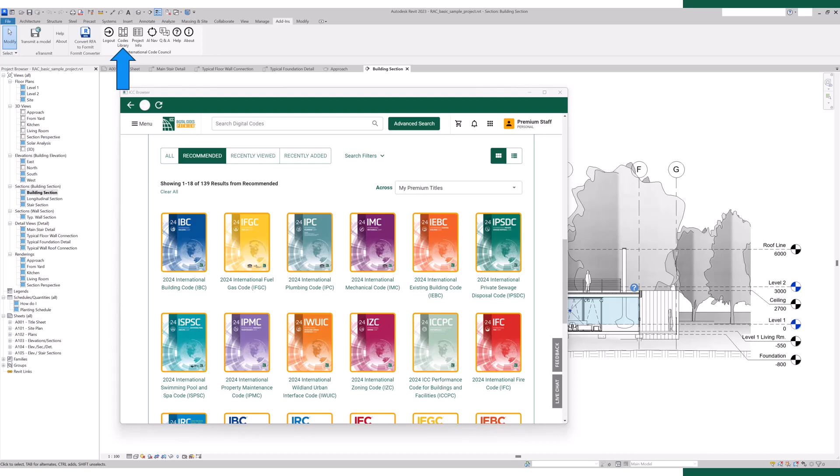In our previous release, we introduced the project information feature where you can document your project information with applicable building codes and save it with your Revit project file, enabling project knowledge sharing and workflows between designers on your team.

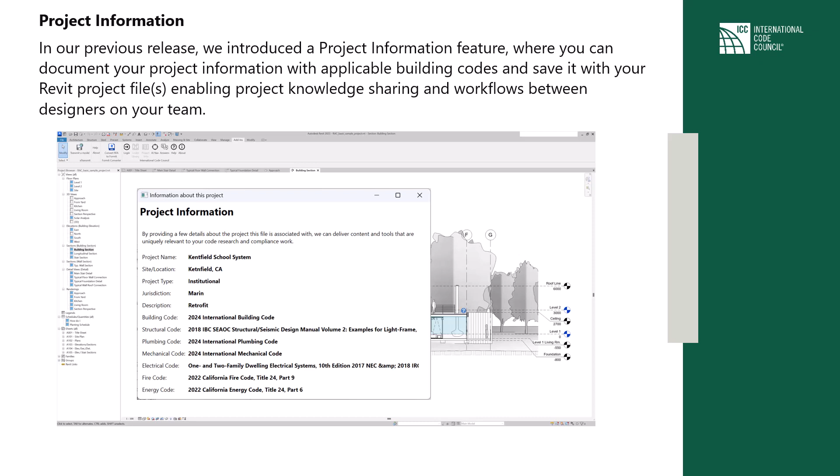What's new is that once you fill out your project information, we'll automatically bookmark those codes in the library and link them to this particular Revit file, making it easier to get to the right code information while you're working inside of Revit.

Also, once you fill out your project information, we will automatically create a project tag on our site. Project tags are immensely valuable when working with a library of information, as they offer a systematic way to categorize and organize data for each project, enhancing your overall efficiency and productivity.

You can use these project tags when you are documenting code information about this project as you're writing notes and attaching bookmarks in each digital code manual.

In terms of leveling up your expertise with the building code, our all-new AI Navigator offers quick, helpful replies to basic code questions and is programmed to help you navigate our iCodes like an expert. AI Navigator uses large language models, artificial intelligence, to provide answers and guidance to the relevant code content for users of our digital codes platform, and it's trained specifically on the ICC iCodes and certain state amended codes.

Also, we've now included access to our new Premium Answers site, which delivers a constantly expanding searchable database of questions and their carefully crafted interpretations from our ICC team of technical experts. Think of it as an ever-growing reference of code interpretations by those experts closest to the code.

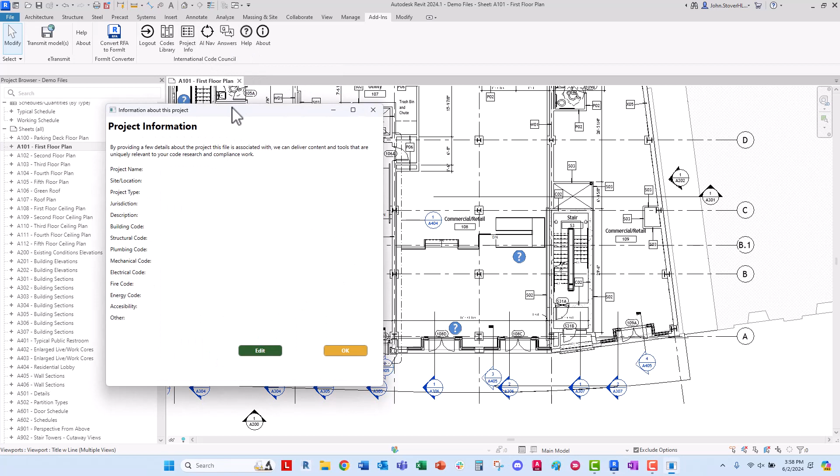In our last release, we implemented a new project information feature to capture key basic elements of the project each particular Revit file is associated with, including all relevant building codes, as you can see here as I fill this out. This information is saved within each Revit file, and anyone with access to the model will be able to see what codes are applicable.

Let's continue to document this project, a mixed-use property in Tempe, Arizona, jurisdiction Maricopa, and fill out a few of the building codes. The 2021 International Building Code. Let's put in a plumbing code specific to the Tempe jurisdiction, click on that, and let's go ahead and save it.

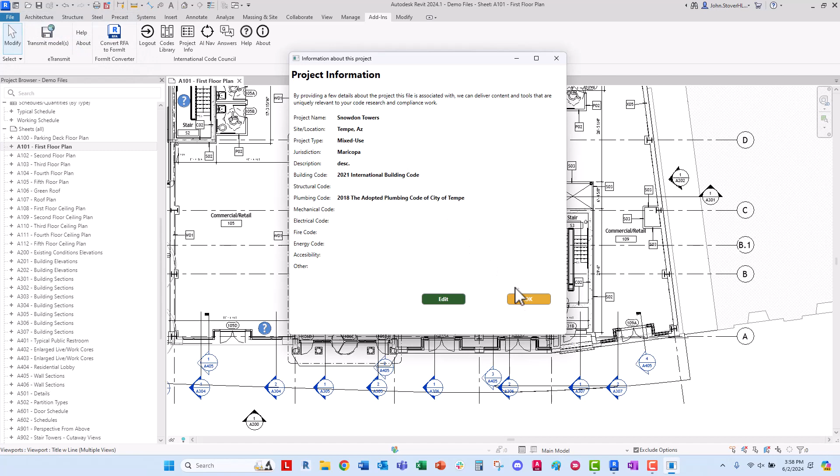Now what's happening is that we are writing this to the cloud service. We'll say OK. We also created a building code summary table or schedule that you can use on your cover sheet when it's all said and done.

So let's go over to the codes library and take a look. Under the menu, click on that. You can open up favorites, and you can see there that we've written each of these titles to your favorites page, so it's quick and easy to get access to them.

And as you can see here, we even have a feature that lets you know where you last left off in the book, in terms of jumping to a section, as well as letting you know which version of the title you're actually reading. So we can click on this and note that there's actually a new version in September 2021.

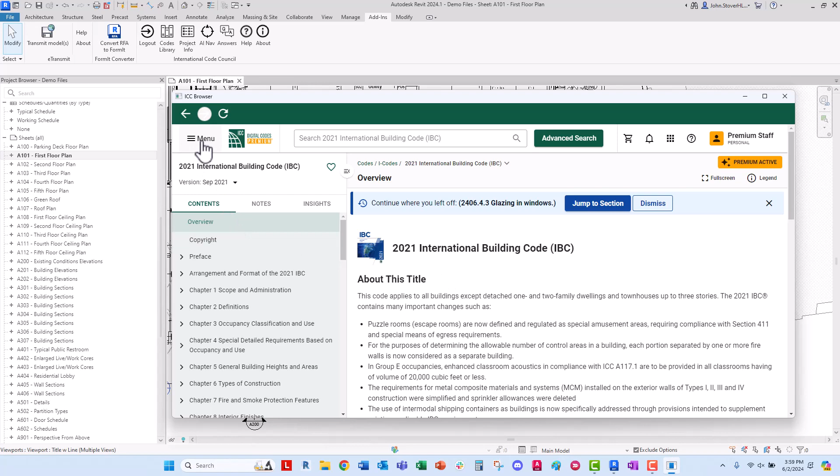And there we go, we know we're on the latest and greatest version of the 2021 IBC. So let's talk about project tags. Let's go back to the menu. Under Premium Tools, My Project Tags. Let's click on that. You can see we automatically created a project tag based upon the name of the project this Revit file is associated with, Snowden Towers in this case.

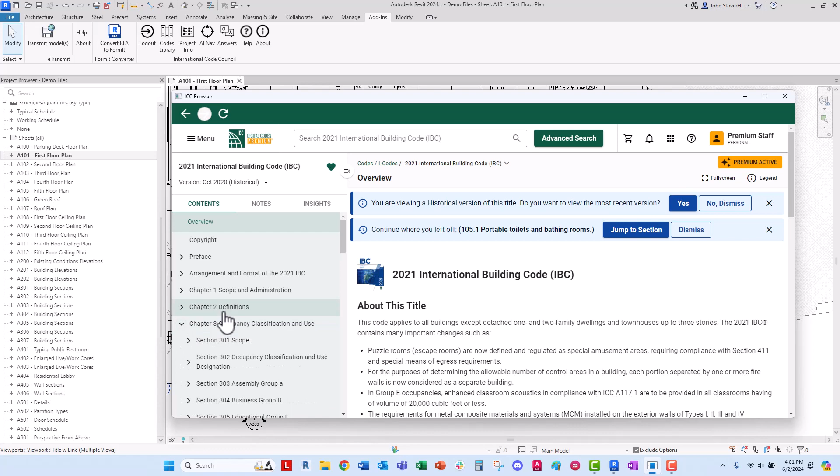So let's see how it's utilized. Let's go back to Favorites and click on the 2021 IBC, and let's go ahead and create a note. I'm going to scroll down here to Business Group B. Here we are, so you can see I can go ahead and click on this information and highlight it, and click on the Notes button, and let's go ahead and create a note that this is important to our project. So write some text there, and then click on the right project, Snowden Towers, say OK. Now this note is associated with the project tag, which is associated with my Revit file.

So let's go see what that looks like. If we scroll down to Premium Tools, click on that and go to My Notes and Bookmarks, you can see that I can now sort by all my projects. Click on Snowden Towers, and you can see this note I just created that's associated with it. So as you can see, project tags are immensely valuable when working with a library of information, as they offer a systematic way to categorize and organize your data for each project, enhancing your overall efficiency and productivity.

So up next is our new AI Navigator. Here's where you can get answers to your code compliance questions anytime. Currently, AI Navigator is trained on ICC's iCodes library, as well as state codes. It searches the 2021 editions of the iCodes, but you can also select from the 2018 or 2015 editions by selecting the Change Code Cycle option you see on screen. We will continually be expanding the scope of content across which AI Navigator is able to answer questions, including the 2024 editions coming soon. All right, so since our project is based in Tempe, I want to inquire about window glazing exceptions.

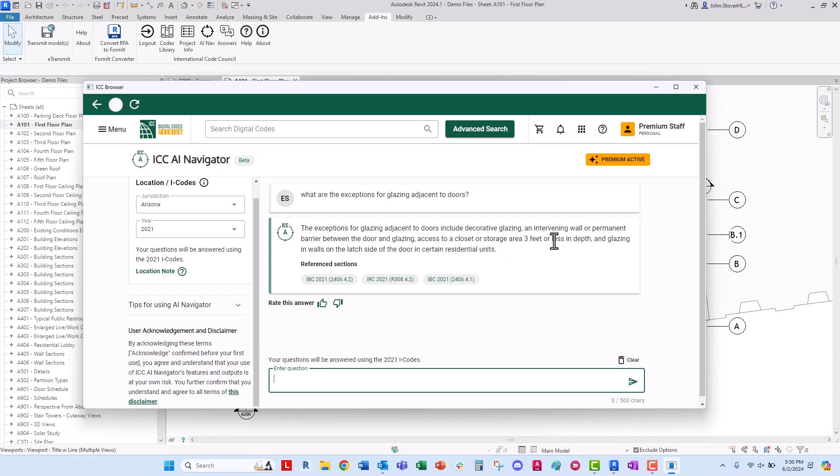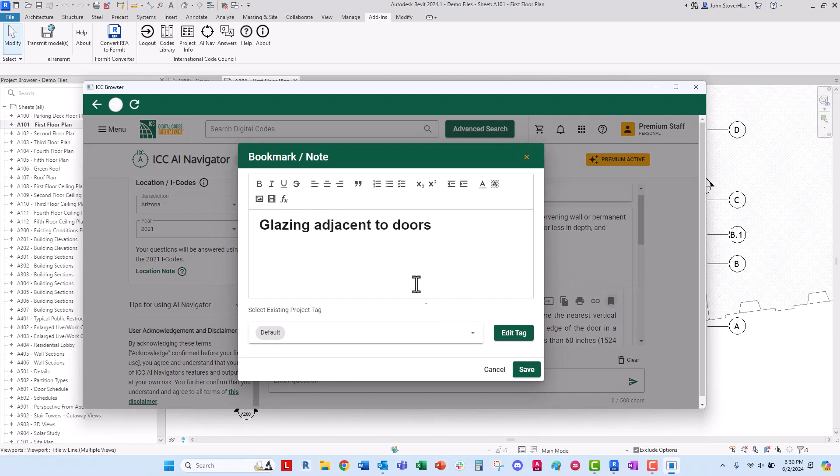So I type in my question where you see it here in the dialog box, and it gives me an answer here after careful review of the 2021 I-Codes that are relevant in the state of Arizona. It provides me with an answer here and links to the appropriate sections of the relevant titles. So let's click on that and go ahead and bookmark this important section for later review. So I'm going to go ahead and click on the bookmark icon to the far right here, and then go ahead and add this to my project. Go ahead and save that.

So AI Navigator can offer quick, helpful replies to basic code questions, and is programmed to help you navigate the I-Codes like an expert. But if you want to talk to the experts, that's where Premium Answers comes up, and we'll get into that next.

So click on the Answers button up in the ribbon, and you'll discover Premium Answers, which delivers a constantly expanding searchable database of questions and their carefully crafted interpretations from the ICC team of technical experts. It offers real opinions from ICC experts on a broad collection of topics. And if you're a member of the ICC, you can submit a question for clarification or review by a team of experts. And these questions, which are most common, get posted here with answers and useful links to relevant code sections where appropriate. Now, I would like to know a little bit more about multi-story atriums and their separations for adjacent spaces.

And as I put in my question in search terms, I can see that I'm in luck. There's an interpretation here. Now I can go ahead and click on that, and let's review the broader question that was submitted on this topic, and then also look at the answer from the ICC team of experts about how they interpret this particular bit of code. And along the bottom, I can see relevant code sections, so I can click on any of these if I want to go deeper in the code of what was referenced in this answer. And let's click on one of these, and you can see it takes me right to Chapter 4, Section 404.6, Enclosure of Atriums. So I can actually dive a little bit deeper on this answer.

Now, a knowledge base like this, questions and their curated answers, can be highly beneficial in your work because it can provide you with reliable information that helps making well-informed decisions, improving the quality and efficiency of your design process or even your review process.